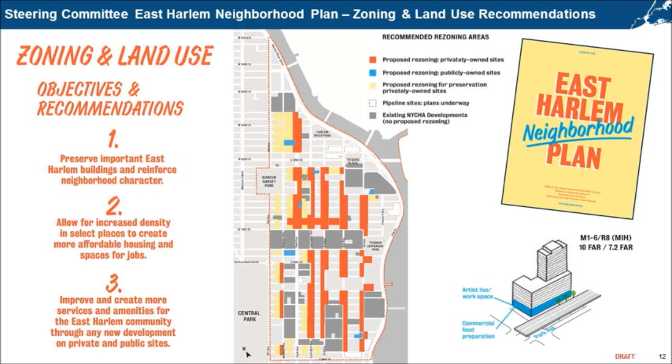Now I will discuss the existing zoning within East Harlem.

There are portions of the district that still have this zoning designation, as shown, and most of the low-rise row houses and pre-war tenements, characterized by 3 to 4 story buildings, were replaced by high-rise tower-in-the-park public housing developments.

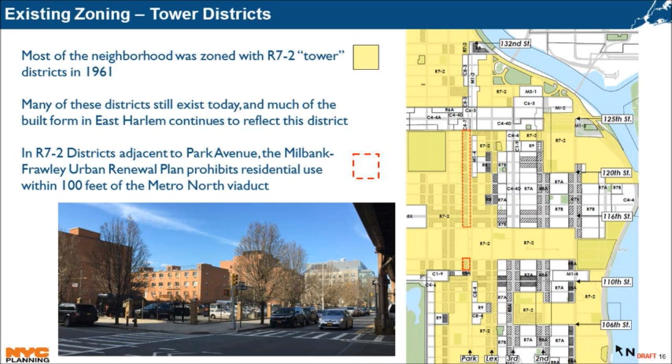Additionally, as a result of urban renewal plans mapped in portions of the district, especially along Park Avenue, shown in red outline, residential development was prohibited within 100 feet of the viaduct. This resulted in a string of parking lots and limited pedestrian activity because of the disjointed street wall and limited ground floor uses.

There are a number of districts within East Harlem where residential development is not permitted by zoning. The northern portion of the study area, above 125th Street along Park Avenue, is characterized by manufacturing and heavy automotive uses, although there are some residential uses that predate the 1961 zoning changes.

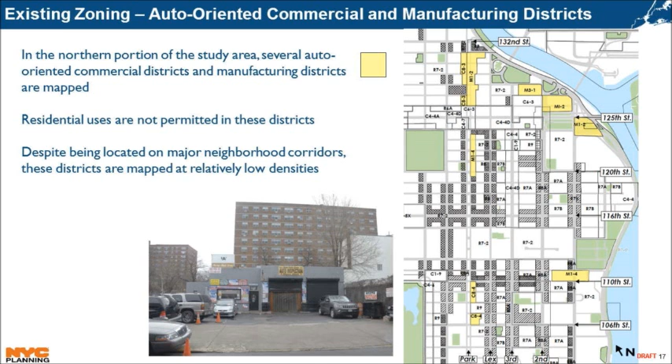The Special Transit Land Use District, mapped in portions of East Harlem along 2nd Avenue as shown in yellow, was created in the 1970s in anticipation of the 2nd Avenue subway. Existing provisions in the zoning are intended to allow for critical subway access and infrastructure.

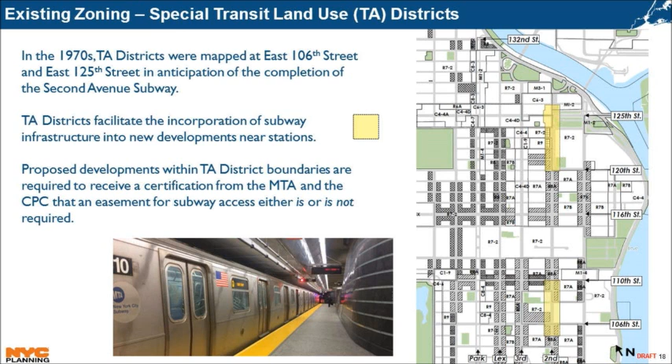In 2003, portions of East Harlem east of Lexington Avenue, between East 96th Street and East 124th Street, were rezoned. This rezoning replaced much of the existing height factor zoning with contextual zoning districts that set maximum street wall and building heights. Unfortunately, the rezoning did not result in a meaningful amount of new development, especially along 3rd Avenue, where some buildings continue to have underutilized vacant upper stories. The current zoning along these corridors does not have affordability requirements.

In 2008, portions of East Harlem were also rezoned as part of the 125th Street Special District, in an effort to strengthen the 125th Street commercial corridor. Special controls were included in certain areas of the district which restricted height limits. However, the height restrictions in the Special District, especially at the 125th Street and Park Avenue node, limit the potential of this area.

So now we'll discuss the existing neighborhood conditions in the district.

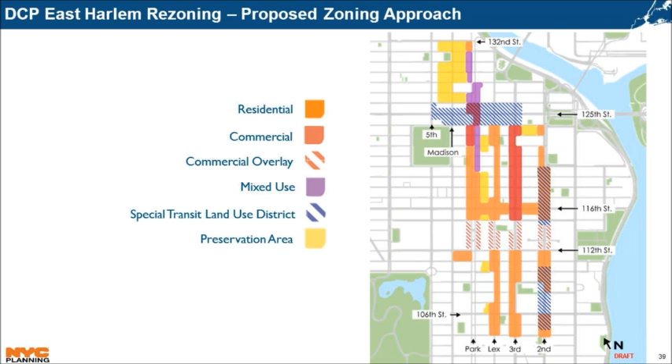In our proposal, we're trying to strike a balance between growth and preservation. In the next couple of slides, I will present a high-level explanation of the strategies that informed our zoning approach. The next part of the presentation, given by Eric Olson, will provide a greater level of detail of the proposed zoning districts based on the strategies I'm about to outline.

As part of DCP's nuanced approach, we are focusing our housing strategy in areas where modifying the zoning can create additional housing opportunities, and for the first time in East Harlem, ensure through the implementation of mandatory inclusionary housing that a significant amount of new affordable housing is required. The mandatory inclusionary housing program will be the baseline from where affordability starts, and where feasible, additional subsidies could be applied to reach deeper levels of affordability on public as well as private sites.

In addition to the housing strategy, the proposal includes strategies for economic development growth as well as job-generating opportunities. These are areas that correspond to areas where there is certain light manufacturing existing today, strong commercial corridors, and areas where the zoning can help create a new regional business district.

The zoning proposal takes into account the future transit needs of this community that will come with phase 2 of the Second Avenue subway. The proposal would modify the special transit land use district, which was originally mapped in the 1970s and does not reflect the current location and needs of the MTA in mapping their Second Avenue subway stations. The proposed changes will allow the MTA to incorporate subway infrastructure, such as station access and ventilation, into new developments surrounding the proposed subway stations.

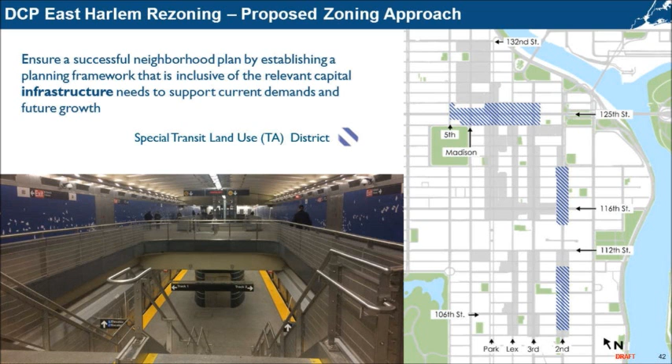There are also select areas in the study's boundaries where the department is proposing contextual districts. These are areas where the department wants to encourage new development buildings that are appropriate for the existing and consistent built context. As you may recall, most of the mid-blocks east of Lexington Avenue were mapped contextually in 2003, and this approach will now be extended to select mid-blocks west of Lexington Avenue.

We're also proposing the creation of a new zoning district, the Special East Harlem Corridors District, that will include more refined controls regarding ground floor use, urban design, and parking.

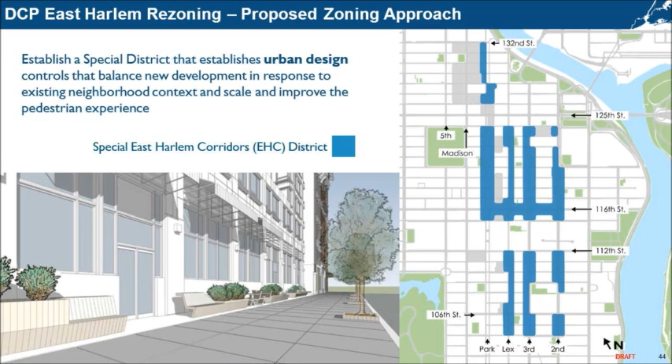As shown in the different zoning treatments being proposed, this zoning framework is not a broad brush, but a targeted approach that takes into account each distinct area in East Harlem. The proposed zoning is just one component of the neighborhood study and has been developed to complement and support a number of efforts being proposed in the city, by the city. Taken together, these approaches are expected to produce as many as 3,500 units of new affordable housing, a significant portion of which will be permanent, as well as over 2,000 new jobs.

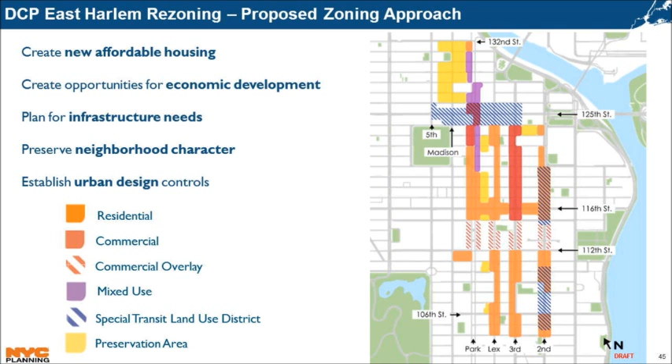To achieve the objectives that were outlined, the Department of City Planning proposes a series of actions including a zoning map amendment, zoning text amendments where we will map and establish the new Special East Harlem Corridors District, amend the special 125th Street District, amend the special transit land use district, and amend Appendix F to establish a mandatory inclusionary housing area. There will also be an amendment to the Milbank-Frawley Urban Renewal Plan, which will help remove some of the restrictions along the viaduct.

So at this point, I will turn the presentation over to Eric Olson, who will go into further detail about the rezoning and our housing and economic strategies, providing illustrative examples of how these proposed envelopes will fit into the context of the neighborhood and meet the goals of our proposal.

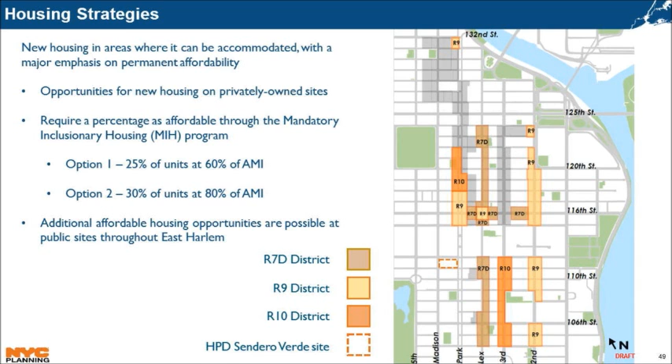On top of MIH, additional housing opportunities are available on a number of publicly held sites throughout the neighborhood. On these sites, subsidies could be provided to create more affordable units and reach deeper levels of affordability than mandated by the MIH program. One of these sites is Sendero Verde, indicated by the dashed orange boundary on the map. You'll be able to hear much more about this proposal very soon, as it's the next item on today's agenda.

Before we get too far, I just want to point out that many of the proposed zoning districts actually have 2 available envelopes, in order to provide the flexibility needed to allow buildings to respond to the differing built context and range of lot sizes in East Harlem.

The contextual quality housing envelope is based on a standard contextual envelope. These include specified ranges for base heights and a specified maximum height limit. This envelope has been modified to allow lower base heights than typical contextual envelopes, which provides flexibility for certain types of developments that may benefit from a lower base height. I'll refer to this as the contextual envelope for shorthand as we move forward.

The quality housing tower envelope is similar to the tower-on-a-base envelope we might see elsewhere. These allow maximum heights to be governed by available FAR with specified minimum and maximum base heights. We've modified the standard tower-on-a-base envelope with additional street wall provisions as well as lowered minimum base heights. I'll refer to this simply as the tower envelope throughout the presentation. These two options will allow the construction of buildings that serve different needs while establishing a level of consistency in the pedestrian experience. I'll now go into detail about these envelopes in the various districts where we've proposed them.

You will be seeing a number of detailed slides on each discrete zoning treatment in the next several minutes. So this is just a warning. This might be a good time to go grab some coffee.

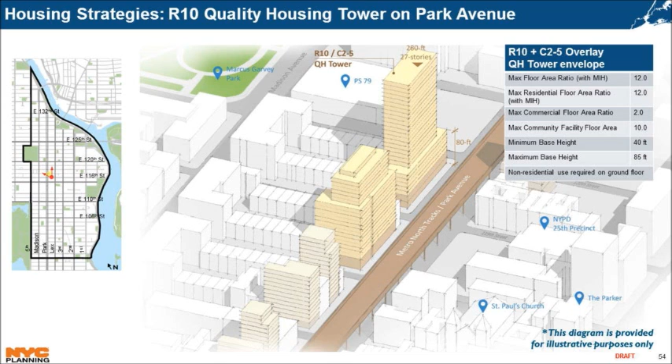There is no maximum total height limit specified within this envelope. Instead, the amount of available FAR effectively limits the heights in these districts. The illustrative massing rises up to 280 feet, or 27 stories. The R10 Tower envelope would have the same FAR available as the contextual envelope, with the ground floor non-residential use requirement as enacted through the special district.

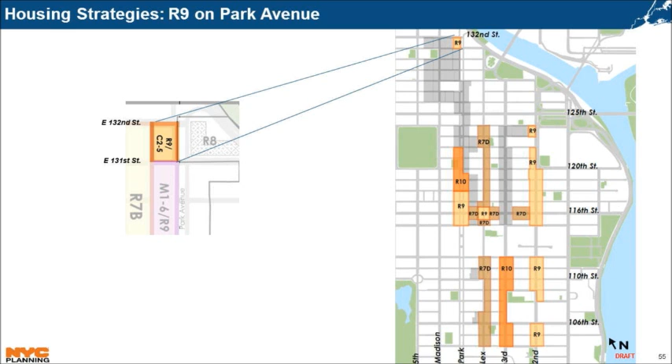Next, I will discuss the R9 districts we propose along Park Avenue, which would be paired with a C2-5 overlay, as in the majority of the residential districts we've proposed. R9 is proposed along the west side of Park Avenue, between East 131st and 132nd Street, which is currently mapped as R7-2. These R9 districts transition to a lower density for areas further away from the transit hub at Park and 125th.

Here's a detail of where we've proposed the same district further south along Park Avenue, between roughly East 115th and 118th Street. MIH would be mapped in each of these areas, as would the Special East Harlem Corridors District.

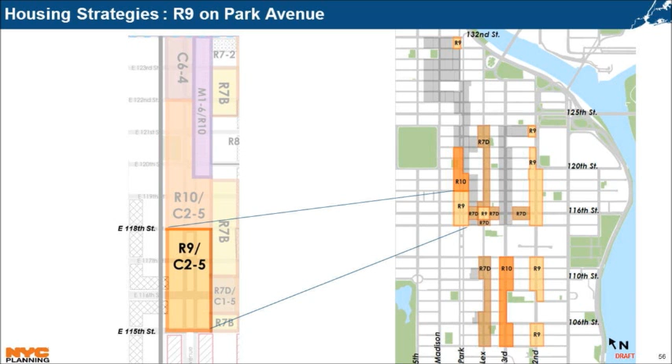This view captures this lower section of Park Avenue looking to the northwest, just north of Taft Houses. This stretch of Park contains some residential buildings that were constructed before the approval of the Milbank-Frawley Urban Renewal Plan. There are fewer parking lots here than in other areas of Park Avenue, and a more consistent street wall.

Possible developments in this area may be smaller due to smaller sites and the lower density district being proposed. The removal of the Milbank-Frawley urban renewal restrictions on residential use within 100 feet of the viaduct would also unlock residential development on this stretch of park.

The R9 contextual envelope has a maximum base height of 125 feet, with a minimum base height lowered to 40 feet as with elsewhere on park. The maximum total height limit in the R9 contextual envelope is 170 feet, or 175 feet with a qualifying ground floor. This is also capped at 17 stories. Through the Special East Harlem Corridors District, we would introduce a maximum residential FAR of 8.5 for all R9 districts, including this R9 district.

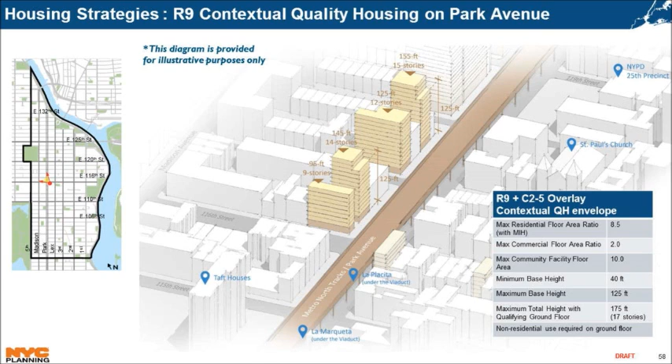So now we'll move eastward to discuss the proposed R7D districts along portions of Lexington Avenue and East 116th Street. We propose this district roughly along Lexington Avenue between 115th and 124th Street. This area is currently mapped with an R7-2 district. The R7D would introduce an appropriate density and built form that would complement the portions of the Lexington corridor with consistent character. C1-5 and C2-5 overlays are proposed along the length of the Lexington R7D district.

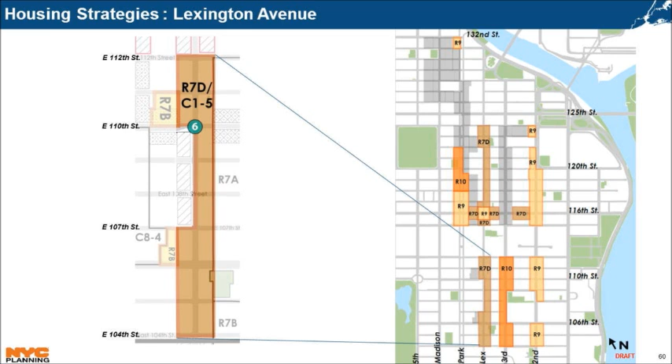Another R7D district is proposed along Lexington between 104th and 112th Street. This R7D on Lexington would introduce a contextual street wall requirement, which would encourage new development compatible with the existing scale and character of the corridor.

The final set of R7D districts are proposed along East 116th Street. The mid-block between Park and Lexington Avenues is currently zoned with R7-2 with a C1-4 overlay, and the mid-blocks between Lexington and 2nd Avenues, here and here, currently have the R7A designation with existing commercial overlays C1-5 that would remain. R7D is proposed along the mid-blocks of East 116th Street, as you can see here, on all these mid-blocks as described between Park and 2nd Avenue.

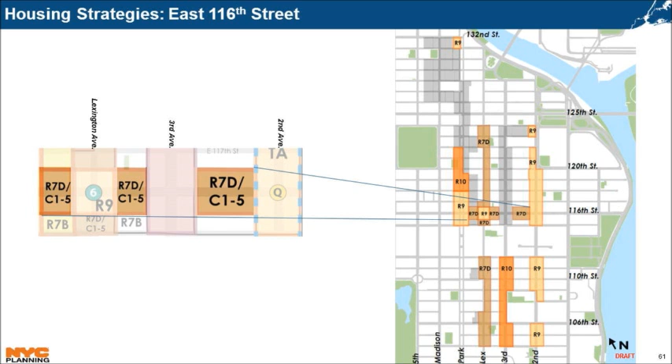Higher densities are proposed at each of the avenue intersections in the area. Here you can see what the entirety of the portion of East 116th Street that would be rezoned would be. East 116th Street is one of the most prominent retail corridors in the neighborhood, and this strategy will focus density on key nodes to integrate this vibrant stretch with other key north-south corridors.

The non-residential ground floor requirement will maintain consistent commercial activity throughout each area highlighted on the map, and the proposed rezoning to R7D districts on the mid-blocks will ensure that new development also includes permanently affordable units through MIH. This varied treatment responds to existing and proposed transit nodes at Lexington and 2nd Avenue, with particular attention paid to the existing scale of these mid-blocks.

The R7D envelope proposed along East 116th Street would be the same as the R7D elsewhere on Lexington. Here's an image depicting Lexington Avenue. We wanted to show this to point out sort of scale and proportionality of the street. It's already, for the most part, been developed to a scale appropriate for the width of the street, which is 70 feet wide. Our proposed zoning is intended to mirror this built form.

This image shows that East 116th Street has a similar character and scale. New developments utilizing the R7D contextual envelope could be expected to largely maintain the existing height and scale of portions of these corridors. The proposed R7D districts have a maximum base height of 95 feet with a minimum base height of 60 feet. Maximum total heights in R7D districts are capped at 110 feet or 115 feet with a qualifying ground floor. The maximum number of stories is 11.

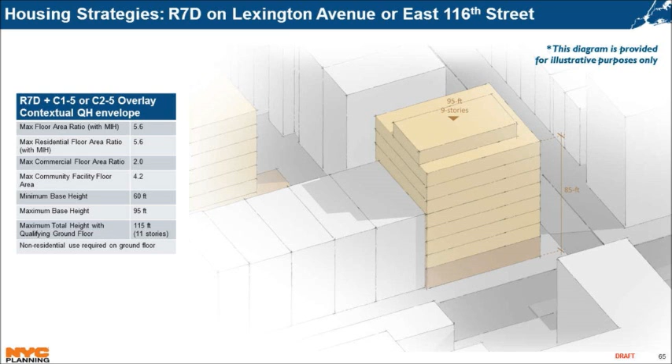So while we're discussing Lexington and 116th Street, let's talk about the zoning envelope we propose at the intersection of these two corridors. Within a 100-foot boundary of this intersection, we're proposing another R9 district with a C2-5 overlay. The proposed R9 district would orient growth at the existing transit node at the 116th Street station along the Lexington Avenue Local 6 line, allowing developments to locate new affordable residential units close to transit.

Here's a view of that intersection facing to the northwest. Compared to other sections of East 116th Street and Lexington Avenue, there are more opportunities for residential development at this node. The R9 contextual envelope is being proposed in this area.

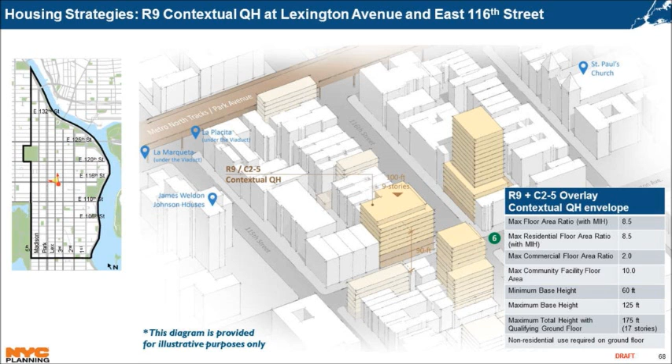The R9 quality housing tower envelope is an option at this node as well. It has base heights from 60 to 85 feet, slightly higher than the proposed minimum base heights along Park, due to the different context. There is no maximum total height specified for this envelope; heights are effectively limited by the amount of available FAR.

Moving eastward to the lower portion of the 3rd Avenue corridor, we'll now focus on the proposed R10 district with a C2-5 overlay between East 104th and 112th Street. This area is currently mapped with an R8A district. Portions of this area of 3rd have been left out of the rezoning due to the presence of the Franklin Plaza Co-op towers.

This is a view facing southeast along 3rd between East 106th and East 109th Street. 3rd Avenue has a highly varied built form with a combination of tenements, towers, and low-scale commercial buildings. This image illustrates the generous width of 3rd Avenue, which has the capacity to accommodate added height and bulk. This, combined with the significant development potential on the avenue and its access to nearby transit corridors, makes 3rd Avenue an ideal location for density.

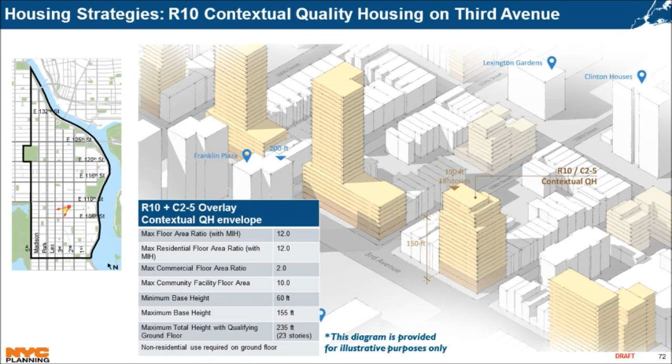There is also a requirement for ground floor non-residential use in this area to maintain activity along this active commercial corridor. Use and FAR regulations would be the same as the previously discussed R10 district on Park.

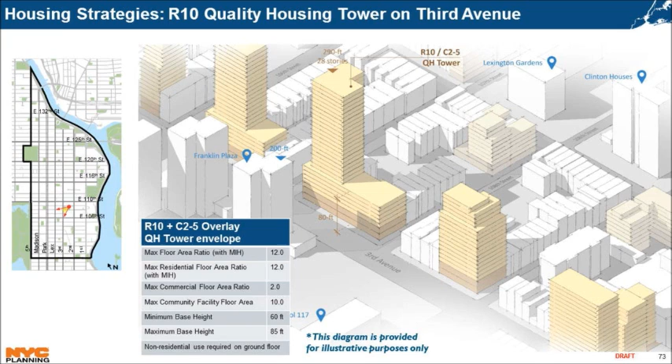So now moving on to 2nd Avenue. R9 districts are proposed along much of 2nd Avenue to direct new residential development in areas close to transit. This area is mapped with R8A districts currently. The proposed density increase would make MIH applicable to ensure that income-restricted units are included in new residential buildings.

This slide highlights the R9 districts proposed along 2nd Avenue north of East 115th Street. This would cover portions of the avenue from 115th to 124th Street, excluding existing tower developments. South of 120th, we are proposing adjustments to the Special Transit Land Use District to accommodate easements for subway access and ancillary ventilation space. We'll describe more about these TA districts later in the presentation.

On the lower portion of 2nd Avenue, we've proposed this same R9 district. Similar to the area to the north, this area of 2nd is currently mapped with an R8A district. The proposed R9 would range from East 104th to East 112th Street, excluding areas again with existing tower developments. You can see that a TA district would be mapped here as well.

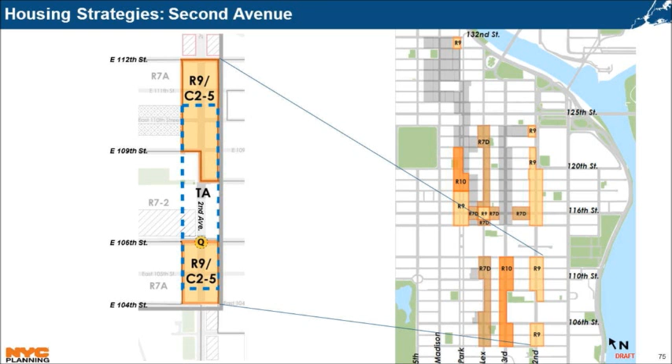This aerial image faces southwest, generally covering the portion of 2nd between East 122nd and East 119th Street. For reference, you can see the location of Taino Towers.

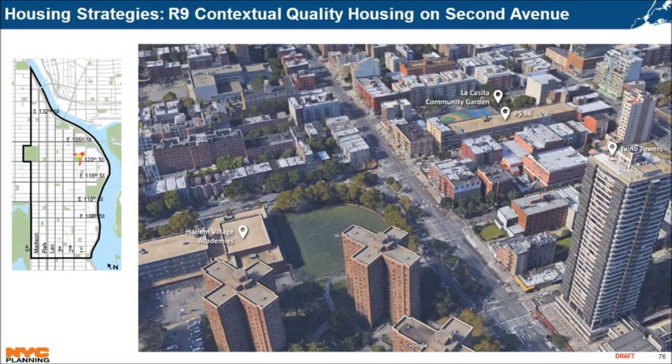These ancillary structures are not provided for in the existing zoning, but are critical pieces of infrastructure to support the future 2nd Avenue subway. Because the floor area allocated to this use would be exempted from zoning calculations, the total volume for this building could be expected to be bulkier and/or taller than a typical development at this site. Buildings shown in this area range between 9 and 17 stories.

So now we'll focus on a portion of 2nd Avenue where a quality housing tower development could occur. This view faces southwest, looking at the area just north of the Jefferson houses.

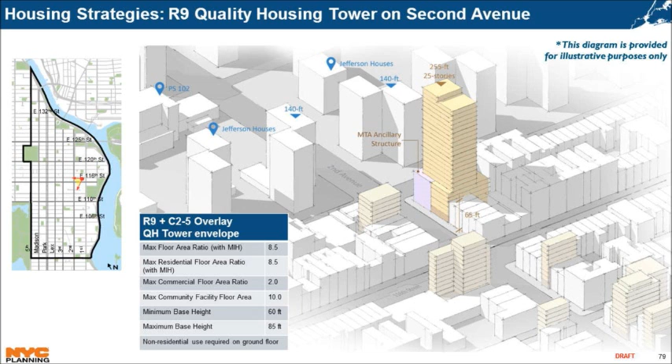We'll now move on to the economic development component of our rezoning strategies.

These strategies are oriented towards preserving the character of existing corridors by continuing to allow the same commercial and manufacturing use groups as today, while at the same time increasing densities in certain areas to encourage developments with a desirable mix of uses. Other components include a new minimum non-residential floor area requirement and mixed-use districts of varying scales along Park. Commercial overlays are also being proposed to promote a more continuous, active retail environment along major corridors.

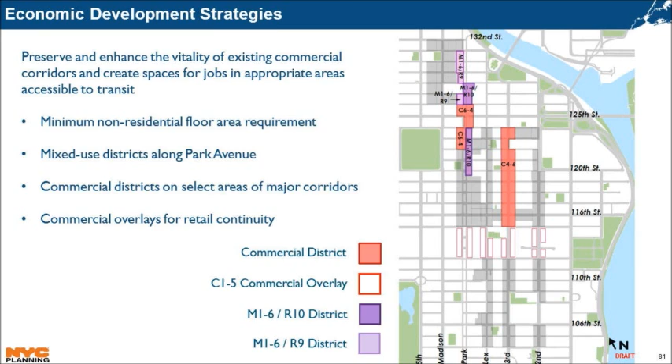So let's begin our detailed discussion of zoning districts as part of our economic development strategies at East 125th and Park at the transit node. As we mentioned earlier, this area is situated to be a major regional transit hub with the existing Metro North and Lexington Line stations and the future terminus of the 2nd Avenue subway. This makes it an appropriate location for the density being proposed, which would permit significant amounts of housing and commercial activities at this important node.

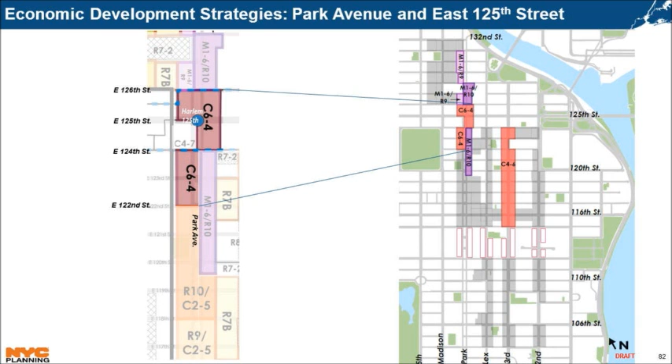C6-4 is proposed along Park Avenue between East 124th and 126th Street, excluding the block frontage on the southwest corner. These block fronts in particular lie within a C6-3 district currently within the existing special 125th Street district. C6-4 is also proposed on the west side of Park Avenue between East 122nd and East 124th Street. These southern blocks are currently zoned R7-2. These two block fronts would lie within the Park Avenue subdistrict of the proposed Special East Harlem Corridors District.

Prominent buildings at the intersection of Park and 125th Street include the Corn Exchange Building on the northwest corner of Park and East 125th, and the Lee Building on the northeast corner, as Calvin explained earlier. Some of us may remember the Lee Building as the building Wesley Snipes swung from in the movie U.S. Marshals, eventually landing on a nearby Metro North train. Just to put everything in context here.

This will produce a mix of retail, performing arts, and other commercial uses at the base of residential developments with permanently affordable units through MIH. Non-residential uses in this area are given 12 FAR floor area, with 2 FAR of non-residential floor area required in mixed-use buildings throughout this part of the special district. This limits residential uses to 10 FAR with MIH. This will likely include both local serving and destination retail, in addition to other job-generating non-residential uses.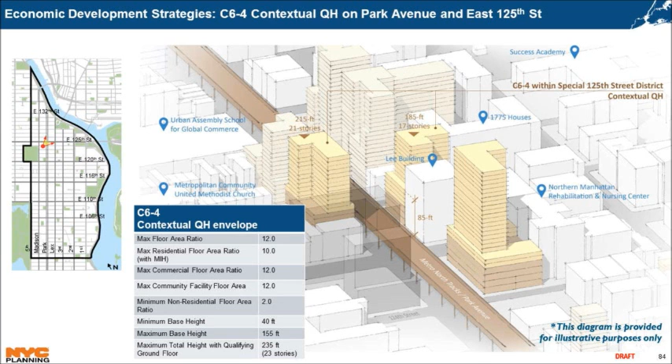Now we'll focus on the C6-4 tower envelope, which is similar to other proposed quality housing tower envelopes we've explained. Buildings on this specific block between 124th and 125th Street on the east side would be required to set back 10 feet from the street line in order to accommodate the high levels of pedestrian traffic adjacent to the Metro North Viaduct.

Building heights here would be limited by available FAR. In addition, due to flight approaches to LaGuardia Airport above 125th Street, heights are effectively limited here by the Federal Aviation Administration to roughly 35 stories.

The same set of FAR and use regulations would apply throughout the C64 district. C6 districts are typically mapped in active business districts rich with transit access, making it appropriate for this area.

Next, I'll describe the new M16R10 districts we're proposing along Park Avenue. To the north, we've proposed this district in an existing M12 district along the eastern block front of Park Avenue, on a superblock between 126th and 128th Street. And we've also proposed it in an existing M14 district further to the south, from roughly East 120th to East 124th Street. The M16R10 district would allow existing light manufacturing uses to remain while providing owners with opportunities to expand in place.

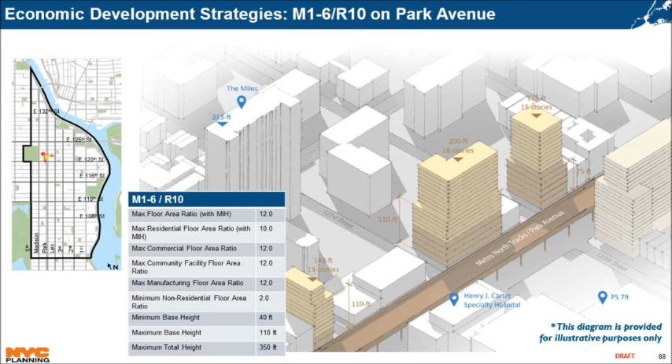The proposed M16R9 district is essentially just a smaller scale version of what I described for the M16R10. We've proposed this to replace existing C83 auto-oriented commercial districts on the west side of Park Avenue from East 126th to East 131st Street, excepting the block frontage where the Urban Assembly School is located.

The lower densities and lower heights in this area are intended to provide a transition between the M16R10 district on the east side of Park and the mid-block preservation area to the west.

There are a number of parking lots and auto-oriented uses in the area today, a substantial underutilization of this area considering its proximity to multiple transit stops.

This view faces southwest from about East 128th to East 123rd Street. You can see the Urban Assembly School here for context.

The massing in yellow shows one development we could expect in the M16R9 district. As with the other proposed mixed-use districts, residential units would be encouraged to locate above the height of the viaduct.

Base heights in these districts would range between 40 and 85 feet, with a total maximum building height of 285 feet. Consistent with the other proposed R9 districts, maximum FAR would be capped at 8.5. Due to the proposed 1.5 FAR non-residential use requirement here, the maximum residential FAR would effectively be limited to 7.

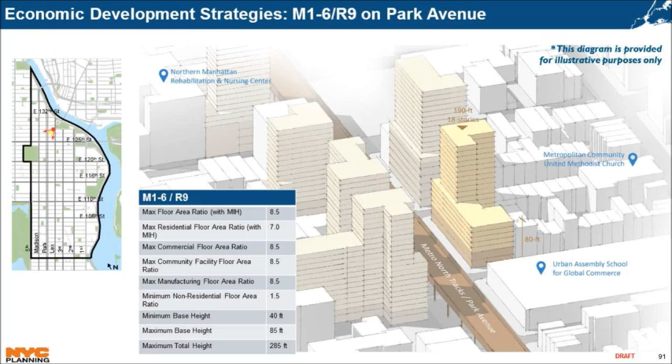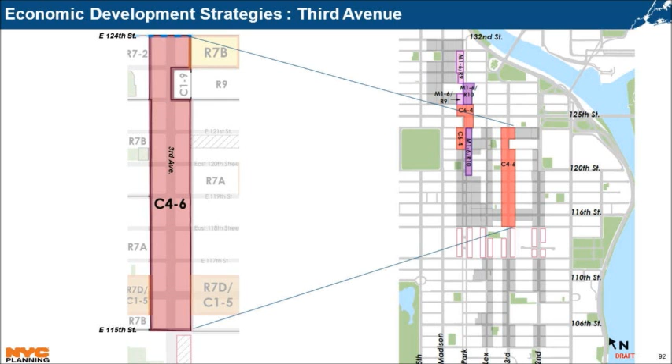Moving east from the Park Avenue corridor, we've proposed a C4-6 district on 3rd Avenue from East 115th Street to 124th Street. This would exclude the block front where Taino Towers is currently located. Today, C44 and C44D districts are mapped on this corridor.

The proposed envelopes would provide the flexibility needed to allow developments to relate to these built form variations. As illustrated by the number of massings you see on the slide, there was a lot of development potential in this area. As with elsewhere on 3rd, the contextual envelope would offer a wider range of base heights, from 60 to 155 feet.

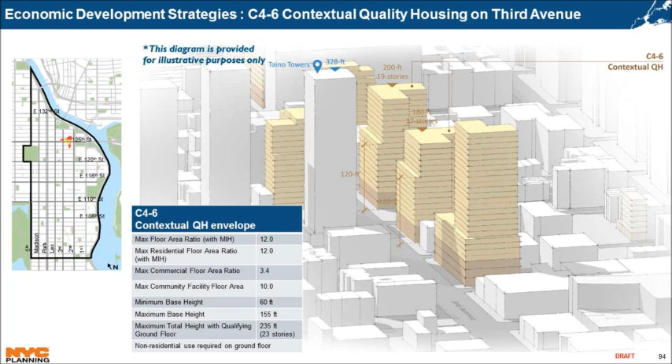Maximum heights are the same as with the other R10 equivalent contextual envelopes we've discussed. The total maximum residential FAR in this area would be 12 with MIH. 3.4 FAR would be available to commercial uses as it is today under the existing C4 districts. This would encourage new developments that match the existing uses on the corridor, which include several buildings with active upper story commercial use.

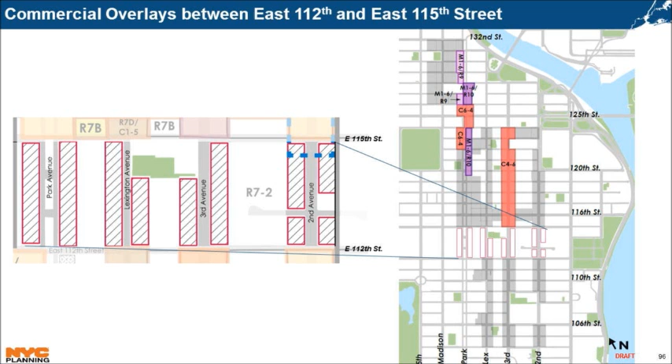Another component of our proposal is the mapping of C1-5 commercial overlays along major corridors between East 112th and East 115th Street, where the King, Johnson, and Taft houses are located. C1-5 overlays are proposed along Park, Lexington, 3rd and 2nd Avenues, excluding areas where schools and playgrounds exist. Active ground floor commercial uses could encourage more pedestrian activity in this area, connecting the vibrant retail corridors along the northern and southern portions of each of these avenues.

Next I will describe our strategies regarding the integration of transit infrastructure as it relates to zoning.

The TA districts exist in East Harlem today in order to provide opportunities to accommodate subway infrastructure into new mixed-use developments to accompany the construction of the 2nd Avenue subway. One way we intend to accomplish our proposed goals is to be inclusive of modern infrastructure needs and better match where the MTA plans to construct new subway stations.

The existing special transit land use district zoning provisions require new developments to certify that an easement either is or is not required for subway access on their property. Though the completion of the 2nd Avenue subway is not expected until 2027, it's necessary to modify the existing boundaries to correspond with anticipated station locations to ensure that the construction of subway infrastructure is appropriately coordinated with new development in these areas.

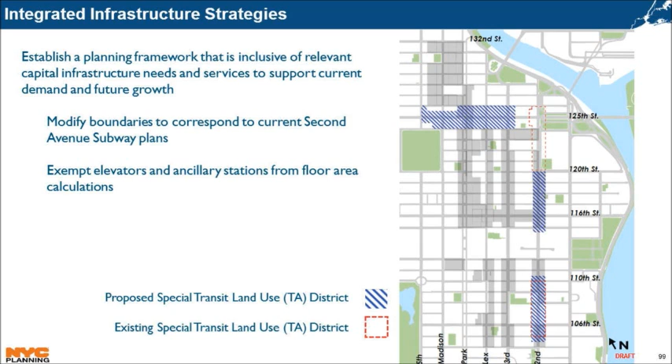To accommodate future plans for the terminus of the 2nd Avenue subway to exist in this location, the proposed actions would map the district roughly between East 126th Street to the north, 3rd Avenue to the east, East 124th Street to the south, and 5th Avenue to the west. The proposed TA district boundary has been mapped to avoid areas where contextual R6A districts were mapped during the 2008 rezoning along East 125th Street.

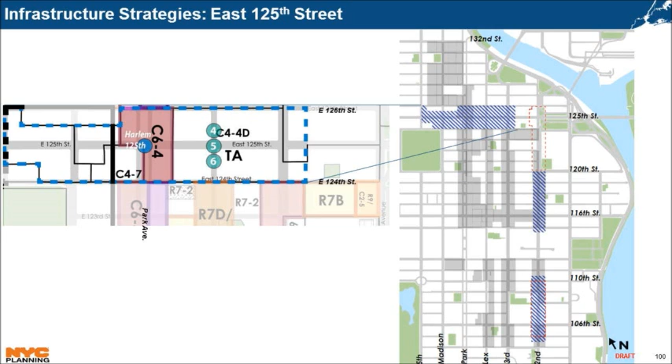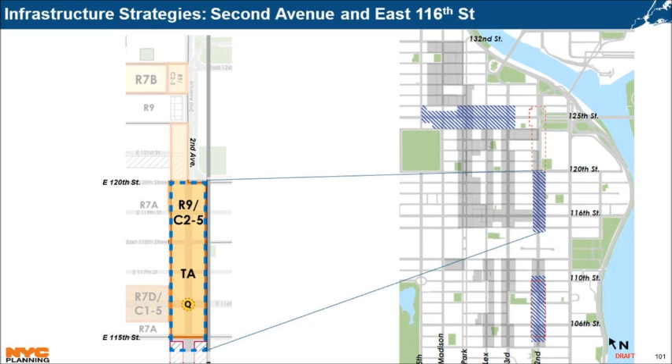The proposal would also map a new TA district to accommodate an anticipated future 2nd Avenue subway stop at East 116th Street. The proposed TA district at East 116th Street would be along 2nd Avenue from roughly 115th to East 120th Street. And further south on 2nd Avenue, the proposal would expand an existing TA district where the future East 106th Street stop would be located.

Existing TA district zoning provisions require new developments within these boundaries to receive a certification from the CPC and the MTA. These two entities make a determination based on a set of findings whether or not an easement for subway infrastructure or access is needed on the site. We are proposing text that would expand the potential use of these easements to include ancillary vent facilities and elevators. This joint certification could require easements based on findings related to a number of factors.

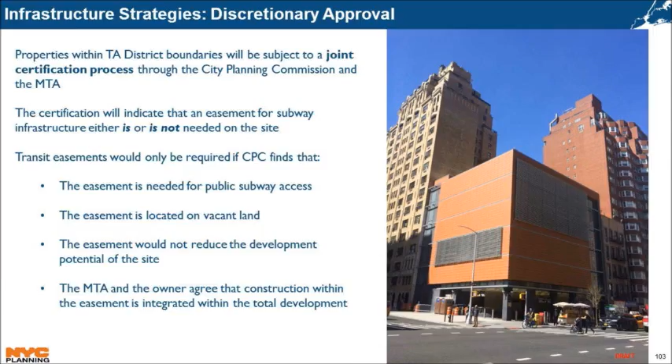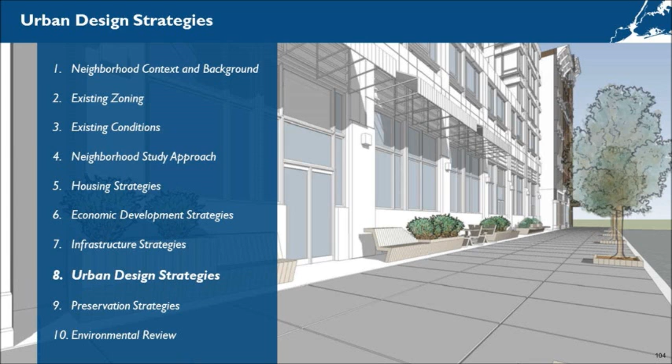Though I've mentioned a number of ways in which the proposed zoning envelopes have been modified through the special EHC district, I'll now summarize the provisions to provide a bit more clarity. The special EHC district includes use and bulk regulations, as well as other zoning treatments to activate the pedestrian realm.

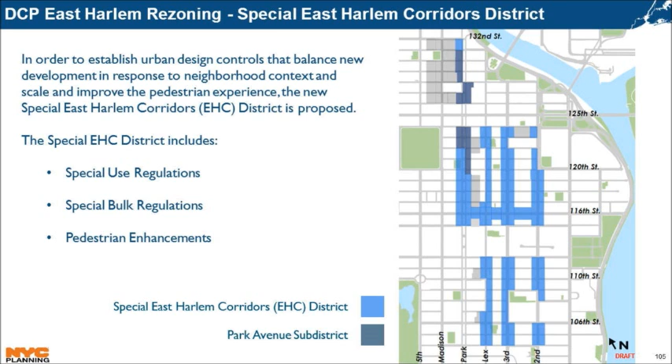I've already mentioned the non-residential use requirements many times, which require a minimum amount of non-residential floor area in the Park Avenue subdistrict, shown in the darker blue shade, and ground floor non-residential use throughout the entirety of the special district. The special EHC district also removes parking requirements tied to residential use, in order to facilitate the efficient production of housing without requiring the added costs of constructing parking.

Just as today, public garages would be allowed of up to 150 spaces in many areas, with 100 spaces allowed in other districts, to allow the market to accommodate potential future demand for parking.

The proposed special EHC district would include a new special permit for hotel use throughout the entire geography. This special permit would be required for any new hotels constructed before a residential development goal has been reached, to ensure that new hotels do not compete with the objective of providing new housing units in the special district. This would also apply within the C6-4 district proposed within the special 125th Street district in this area.

Another new provision of the special EHC district would allow residential and non-residential use to be located on the same floor, provided that an adequate barrier is in place to separate these two uses.

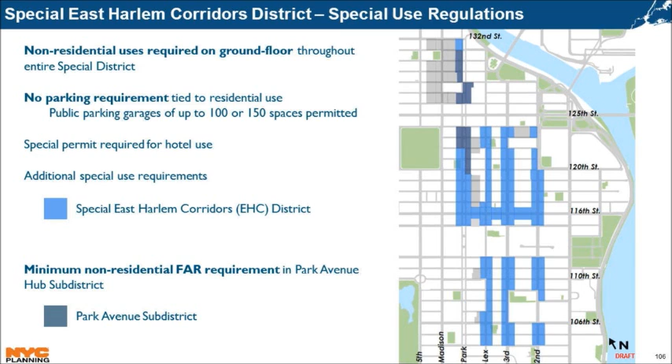We've also included many provisions that are typically a part of enhanced commercial districts mapped elsewhere in the city. This includes a requirement that 50% of facades are transparent, as measured between a height of 2 and 12 feet. These provisions would be relaxed for uses like light manufacturing, which could be constrained by this requirement.

The special district also limits the width of residential lobbies to 25% of the building frontage, up to a width of 40 feet, with no lobby required to be less than 20 feet. Curb cuts would not be permitted along wide streets to ensure a continuous pedestrian flow.

Additionally, a set of provisions is included that would apply to portions of the proposed rezoning area that lie within the flood zone. These were designed to encourage flood resiliency and good urban design by providing options for buildings that need to elevate their ground floor to reduce the potential for flood-related damage.

And finally, we'll discuss preservation-oriented strategies. Before we get into it, I want to point out that these strategies are concerned with the preservation of built form, as opposed to the preservation of affordable housing units or historic resources.

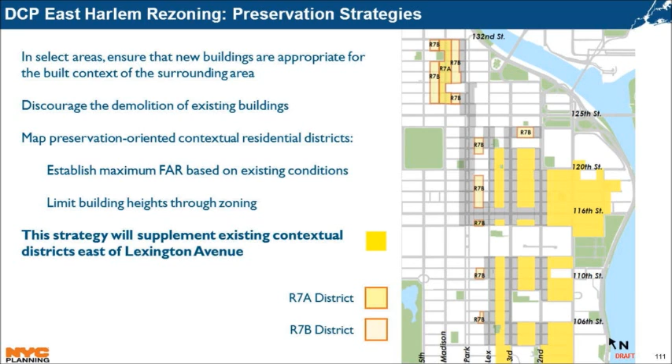We'll begin with the proposed R7A district along Madison Avenue between roughly 126th and 132nd Street. Block fronts with school or playground uses have been omitted from the proposed rezoning area. This area is currently mapped with an R7-2 district, which would remain on the sites with school use.

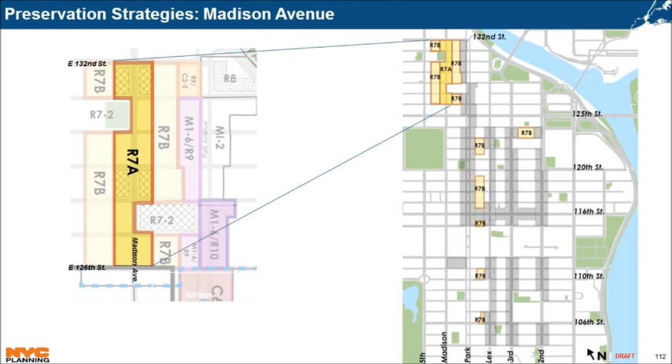This section of Madison is largely characterized by residential use with some intermittent commercial and community facility uses. As depicted in this image, the street wall along this stretch of Madison is relatively consistent, as are heights and densities along the corridor.

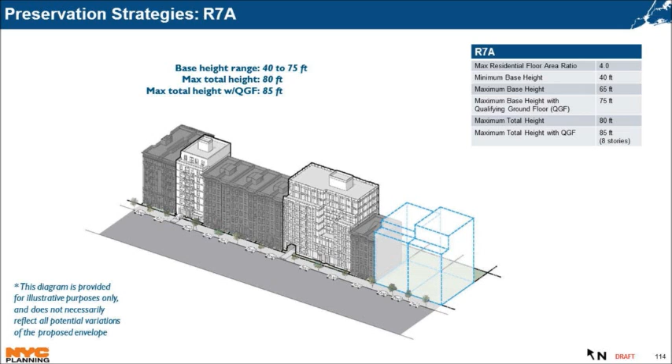This diagram depicts how the R7A district would require new developments to more closely match the existing built form. The R7A envelope offers 4 FAR for new developments and is meant to be mapped along wider streets such as Madison Avenue in this area. Base heights could range between 40 and 65 feet, or 75 feet with a qualifying ground floor. Maximum total height would be set at 80 feet, or 85 feet with a qualifying ground floor.

On mid-blocks throughout the study area, we've proposed a number of R7B districts as well. These are depicted in the lighter shade of yellow shown on the map.

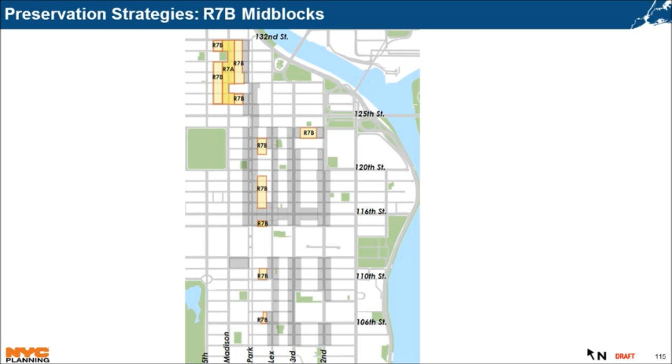The R7B envelope is meant to be mapped on narrow streets where we propose these districts throughout East Harlem. The maximum FAR is capped at 3, with base heights ranging between 40 and 65 feet. The permitted total maximum height is 75 feet, which is slightly lower than with the R7A.

And that concludes our section on preservation-oriented strategies. Here you can see all of our strategies combined in a map depicting our proposed map amendments.

To state the obvious, I covered a large amount of information about the rezoning proposal. The numerous strategies covered are all directed towards achieving the intended goals of the rezoning, including to create opportunities for new housing, with a focus on opportunities to require new permanently affordable housing, to create opportunities for economic development while preserving the vitality of existing commercial and manufacturing uses, to support current demands and future growth by establishing a planning framework that is inclusive of modern transit infrastructure needs.

To modify the existing zoning where needed to preserve neighborhood character, and to establish a special district with urban design controls that balance new development in response to existing context and scale. Hopefully, throughout the course of this presentation, it has become clear that DCP has employed a nuanced approach to this proposal.

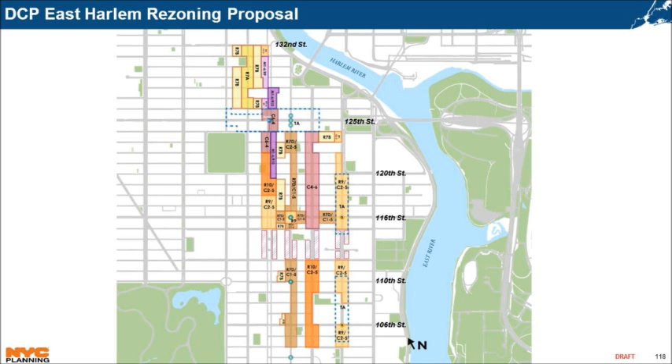More importantly, though, the proposal would lock in MIH in much of East Harlem to bring requirements for the creation of permanently affordable housing to areas where this requirement does not currently exist.

The presentation will now conclude with a brief section regarding environmental review. There's only one slide left.

The DEIS does identify the potential for a few types of significant adverse impacts in other chapters. These include impacts related to construction noise, historic and cultural resources, transportation, including traffic, pedestrian, and transit, and shadow impacts on certain sensitive receptors in the area.

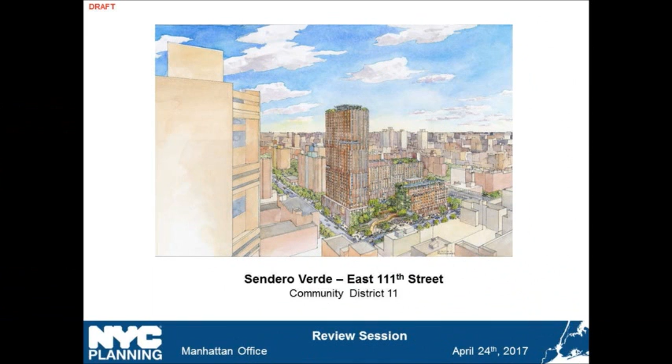Thank you. Good afternoon, Chair Lago, Commissioners. This is an application by the New York City Department of Housing, Preservation, and Development for a number of discretionary actions to facilitate the development of a mixed-use building with residential, commercial, and community facility uses on a block bounded by East 112th Street, Park Avenue, East 111th Street, and Madison Avenue.

The applicant is seeking a zoning map amendment to rezone an existing R7-2 zoning district with a C1-4 overlay to an R9 zoning district with a C2-5 overlay, a zoning text amendment to establish a mandatory inclusionary housing area, Urban Development Action Area Plan, or UDAAP, designation and project approval for the disposition area, disposition of city-owned property, acquisition of a portion of the disposition area by the city for community garden use, a special permit pursuant to section 74-743 to modify the bulk regulations within a large-scale general development to modify height and setback restrictions and yard requirements applicable to the proposed development.

A special permit pursuant to section 74-744B to permit commercial floor area to be located above the second story in a mixed-use building, a special permit pursuant to section 74-532 to waive up to 129 accessory parking spaces required in connection with non-income restricted dwelling units within the proposed development, and a City Planning Commission certification pursuant to section 32-435 to waive the requirement that a minimum of 50% of a building wall facing upon a wide street be occupied at the ground level by commercial use.

The project area is located in the East Harlem neighborhood of Manhattan in Community District 11. The properties surrounding the project area are zoned R7-2 and R8A with a C1-5 overlay mapped along 110th Street between Park and Madison Avenues, and C1-4 and C2-4 overlays mapped along Madison and Park Avenues.

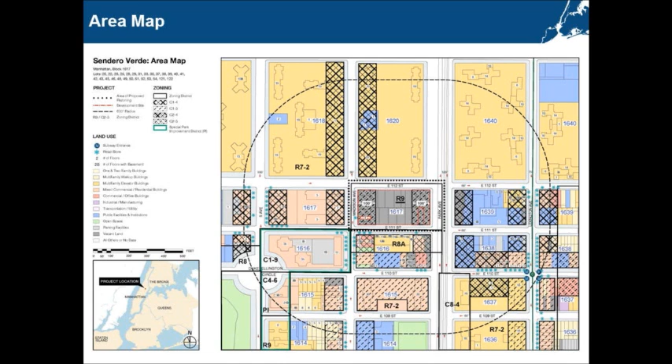The project area is an entire block bounded by Park Avenue to the east, East 111th Street to the south, Madison Avenue to the west, and East 112th Street to the north. The project area contains approximately 76,576 square feet of lot area.

The majority of the project area is city-owned parcels, and the city-owned portions are all contained in this red outline here. The remaining 2 lots located in the project area are privately owned and not part of the development site.

Lot 21, located right here, is improved with a single 4-story building comprising approximately 4,100 square feet of floor area and containing 8 residential units as well as 2 commercial units. Lot 34, located right here, is currently utilized as surface parking and used for storage.

In prior years, part of the development site was used as a baseball field by the East Harlem Little League under temporary license with HPD. The license agreement expired in October of 2016, and the East Harlem Little League has obtained a permit through the Parks Department to play on a nearby Parks Department field. The lots previously licensed to the Little League are currently vacant.

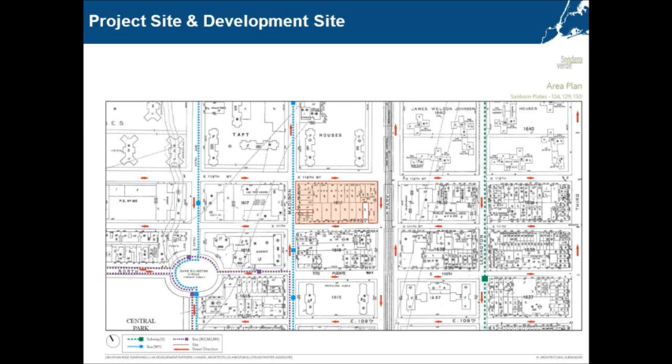This right here is one of the out parcels with the 4-story development. You can see the vacant lot where the Little League used to play. This right here is Lot 34, which is the vacant parking lot.

The development site currently contains 6 interim Green Thumb gardens that are located on city-owned parcels along the Park and Madison Avenue block frontages. These interim gardens operate under a temporary license agreement with HPD, which have allowed for garden-related activities until a viable development scenario can be achieved for the site.

The proposed development includes the construction of 3 predominantly residential mixed-use buildings on the development site, ranging in height from 10 to 37 stories. In total, the proposed development contains approximately 718,447 square feet of floor area, or 9.38 FAR, of which approximately 544,069 square feet of floor area will be residential, or 7.1 FAR.

33,794 square feet will be commercial, that is 0.44 FAR, and 140,485 square feet, or 1.83 FAR, of which will be community facility use. The development will occupy all frontages of Block 1617 along East 111th Street, Madison Avenue, East 112th Street, and Park Avenue, on all areas except for those development sites that are not currently owned by the city.

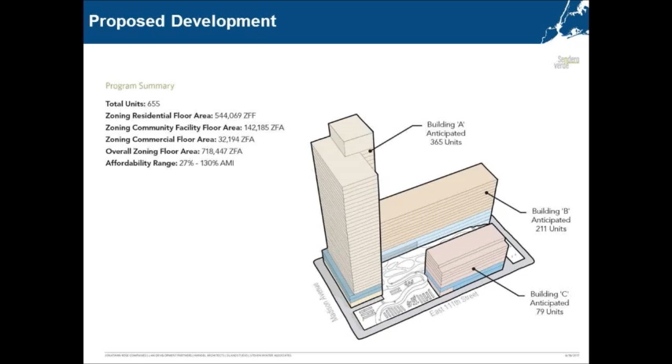Building A will contain approximately 365 residential units with approximately 308,723 square feet of residential floor area, approximately 10,311 square feet of community facility floor area, and approximately 32,194 square feet of commercial floor area. Part of this commercial floor area will include a supermarket.

Building B, seen right here, is proposed to be located along the remainder of the East 112th Street frontage and wrap around Madison Avenue for a depth of approximately 72 feet. It is proposed to have up to a 5-story base that rises up to 85 feet above the base plane. Above the base, the building would set back the required 10 feet from the street line and rise to a height of 15 stories with a height of up to 218.5 feet.

Building B will contain approximately 211 residential units with approximately 163,945 square feet of residential floor area and approximately 120,934 square feet of community facility floor area. A portion of this community facility floor area would be a charter school.

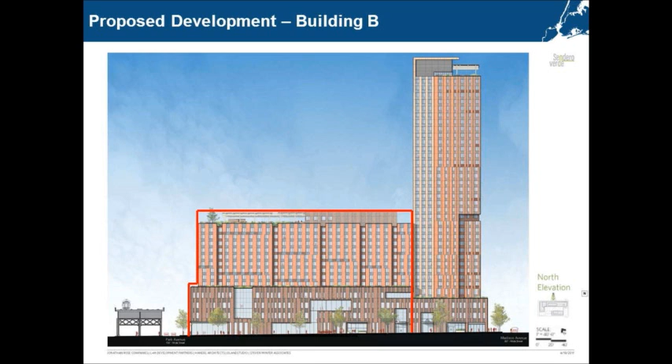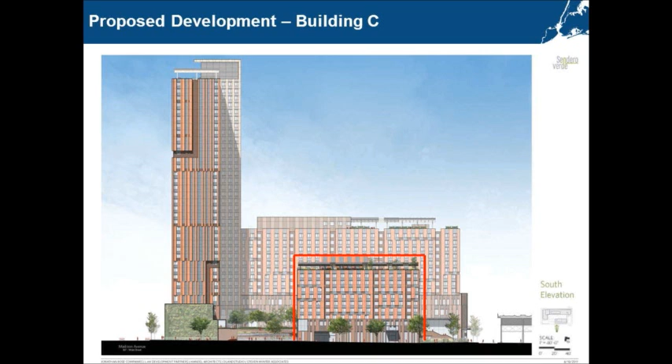Building C is proposed to be located on the mid-block frontage of East 111th Street. It is proposed to have up to a 7-story base that rises up to 94.34 feet above the base plane. Above the base, the building will rise to a height of 10 stories, with a height of approximately 151.34 feet. Building C will contain approximately 79 residential units with approximately 71,401 square feet of residential floor area and approximately 10,941 square feet of community facility use.

Buildings A, B, and C will be built to passive house standards. To achieve passive certification, the project will employ a number of sustainability features, including a stormwater detention tank to provide recycled water to the on-site community gardens, bioswales, and street trees on the sidewalks surrounding the site, photovoltaic arrays on each of the bulkheads, and green roofs featuring solar pergolas with photovoltaic arrays.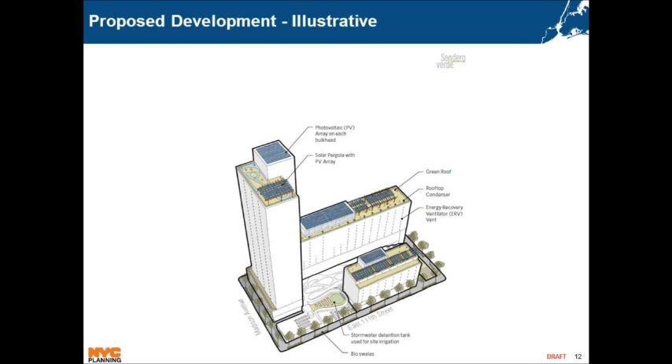The proposed buildings will form a courtyard within the center of the development. The courtyards will provide passive landscape recreation space and propose to include features such as a medicinal garden, seating, and general green space. Public entrances to the courtyards will be provided along Park Avenue through a staircase and elevator, as well as along East 111th Street through an ADA accessible path. The courtyard will also be accessible through rear entrances that join the community facility spaces.

Community gardens will be located on the corner of Park Avenue and East 111th Street, on the corner of Madison Avenue and East 111th Street, and on East 111th Street, extending in a terrace fashion towards the elevated courtyards described above. So the garden areas are located here, here, and here. The garden area will accommodate approximately 4 of the existing interim Green Thumb gardens. The remaining 2 gardens located on the development site have been offered relocation sites on other nearby existing DPR gardens pursuant to the garden rules.

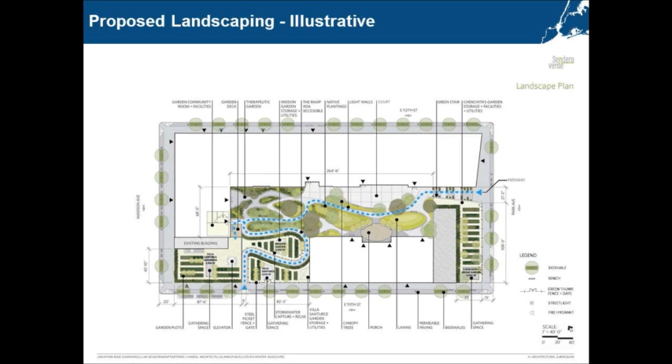A dedicated community room and bathroom, available to members of all 4 gardens, will be located within Building A. An additional bathroom will be located adjacent to the community gardens on Park Avenue. Additionally, a public pathway will pass through the gardens along East 111th Street, connecting to the interior courtyard, which must be maintained by the owner of the proposed development and remain accessible to the public during hours to be determined through negotiations between the City of New York and the developer.

According to the applicant, the proposed orientation of the 3 primary residential buildings within the development are massed in a manner that preserves the maximum amount of open space that currently exists within the development site and offers a design that provides contextual juxtaposition to the tower-in-the-park developments located directly to the north, and a contextual counterpart to the mid-rise development in the surrounding area.

Further, the applicant asserts that contextual street walls and height of the proposed development provide a balanced composition massed at a complementary scale, rising from the street line with various heights to provide visual variety. Furthermore, the applicant indicated that by orienting the community gardens along East 111th Street, the south-facing frontage of the development site, their placement is optimized to receive the maximum amount of sunlight available to ensure the success of the gardens planted in these areas.

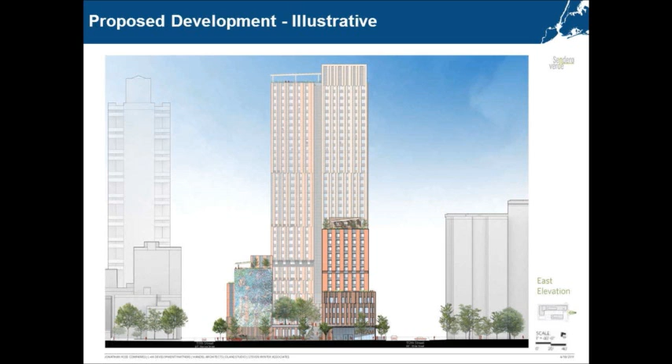Now, the actions necessary to facilitate the project. The applicant seeks a zoning map amendment to change the project area from an R7-2 zoning district with a C1-4 commercial overlay along the Park and Madison Avenue frontages to an R9 zoning district with C2-5 commercial overlays along the Park and Madison Avenue frontages. The proposed R9/C2-5 district is intended to facilitate the development of affordable housing, provide community facility space, and provide continuity on the Madison Avenue commercial corridor.

According to the applicant, the proposed R9 zoning is consistent with the context of the buildings in the surrounding area and conforms to the prevailing trend towards high-density residential development in the neighborhood. All of the blocks located immediately north of the project area contain buildings constructed in the tower-in-the-park style and rise up to 20 stories.

The project area is also 3 blocks north of a recently approved affordable housing development that also utilizes an R9 residential district. The R9 district bulk regulations proposed for the project area permit buildings up to 175 feet in height that must be located at the street line, and provide a permitted bulk envelope at the development site location, which, according to the applicant, serves to mediate the existing tower-in-the-park high-rise developments located to the north and west from the existing mid-rise buildings located to the west and south.

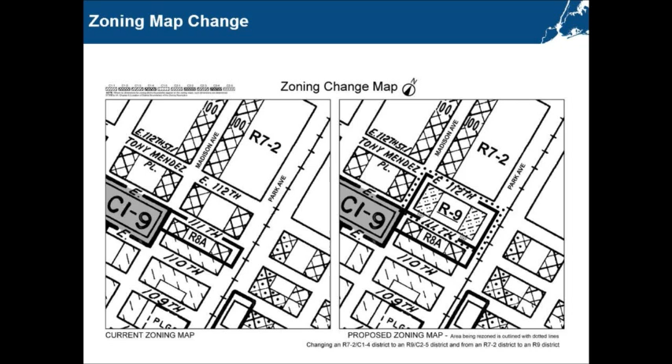The applicant also seeks to amend Appendix F of the zoning resolution to establish a mandatory inclusionary housing area over the project area. The applicant is proposing to utilize Option 2, and therefore requests the City Planning Commission and City Council to allow the MIH affordable housing requirements to be met by complying with Section 23-154(d)(3)(ii) requirements and providing no less than 30% of the residential floor area to households earning an average of 80% AMI.

The applicant is requesting approval of an urban development action area and project approval and the disposition of city-owned property. The applicant also requests to acquire a portion of the disposition area for use as community garden space and a publicly accessible path. The garden area and path portion would be acquired by the city upon or before project completion, including completion of construction of the garden area and path.

The applicant is seeking a special permit from the City Planning Commission pursuant to Section 74-743 to modify the bulk regulations within a large-scale general development, to modify height and setback restrictions and yard requirements applicable to the proposed development as follows. Pursuant to Section 23-65, the tower regulations, buildings developed with a tower shall comply with either tower and base, or standard tower regulations.

Pursuant to Section 23-65A, any building with more than 25% of its total floor area dedicated to residential use and located on a zoning lot that fronts upon a wide street, and is within 125 feet from a wide street frontage along the short dimensions of the block, or within 100 feet from a wide street frontage along the long dimensions of the block, must be developed or enlarged pursuant to the tower and base provisions.

Further, if any building is developed with a tower, then the entire zoning lot shall be subject to the tower and base provisions. Section 23-65B provides that standard tower regulations of Section 23-652 apply to any building that does not meet the location criteria of Section 23-65A.

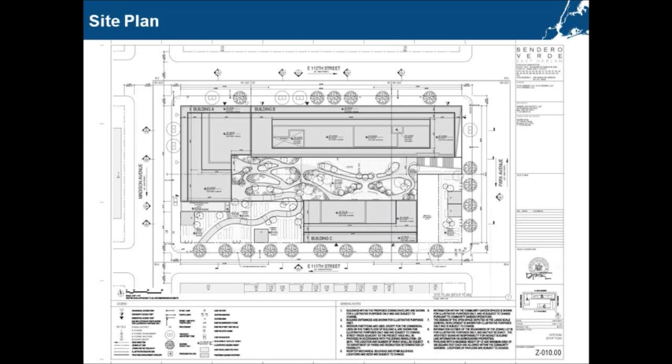Since all the buildings on the proposed development site, including those portions beyond 125 feet from the wide street frontage along the short dimensions of the block, and beyond 100 feet from the wide street frontage along the long dimensions of the block, are proposed to be subject to the tower and base provisions, the applicant is requesting that the Commission waive the location criteria of Sections 23-65A and 23-65B to apply the tower and base regulations to the entire development site.

Section 23-651A1 requires that at all levels, a tower meeting the location and floor area requirements of Section 23-65A that is developed on zoning lots of at least 20,000 square feet shall occupy between 30 and 40% of the lot area in the aggregate. As previously discussed, a portion of the proposed development will not meet the location criteria of Section 23-65A.

The applicant is requesting that the Commission permit the aggregate tower calculation to be based upon the entire area of the development site, including those areas beyond 125 feet from the wide street frontage along the short dimensions of the block. Further, tower coverage ranges from 51%, which you can see right here,

at 85 feet, to 13% above 196.5 feet, which you can see right here. The applicant is requesting the Commission to modify the tower coverage requirements to permit the towers of all buildings on the zoning lot to occupy, in the aggregate, an area comprising less than 30% of the lot area of the zoning lot at the upper levels of the tower, and more than 40% of the lot area of the zoning lot at the lower levels of the tower.

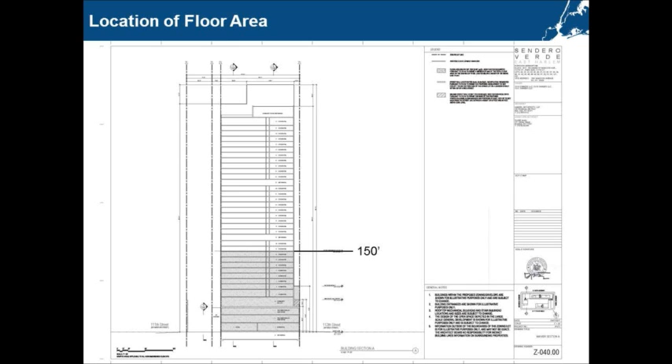Section 23-651A3 requires that a minimum of 60% of the total floor area permitted on the zoning lot be located below 150 feet. As the proposed development will contain 424,169 square feet of zoning floor area, or 55% of the total floor area, located below 150 feet, the applicant requests that the Commission modify floor area location requirements to permit 55% of the total floor area to be located below 150 feet.

Section 23-651B1 requires that a street wall be provided for the entire frontage of zoning lots fronting on wide streets and on narrow streets within 125 feet of an intersection with a wide street. Section 35-64A1 requires that mixed-use buildings developed as tower-on-base in R9 or R10 districts with a commercial overlay provide a street wall for the entire width of the base, located on the street line of zoning lots fronting on wide streets and on narrow streets within 30 feet of its intersection with a wide street.

As community gardens are proposed for much of the frontage of Park Avenue, which is a wide street, and East 111th Street, which is a narrow street within 125 feet of its intersection with Park and Madison Avenues at the southern corner of Madison Avenue, where another garden is proposed, no street wall is proposed for those areas. Additionally, no street wall will be provided at the northeast corner of the zoning lot at the intersection of Park Avenue and East 112th Street, as the proposed ground floor of Building B will be undercut at the ground floor.

The applicant requests that the Commission modify the street wall requirements pursuant to Section 23-651B1 to permit the proposed development to not occupy the entire frontage of the zoning lot along a wide street and on narrow streets within 125 feet of its intersection with a wide street, and to permit the base of the street wall of the proposed development to not be located entirely at the street line.

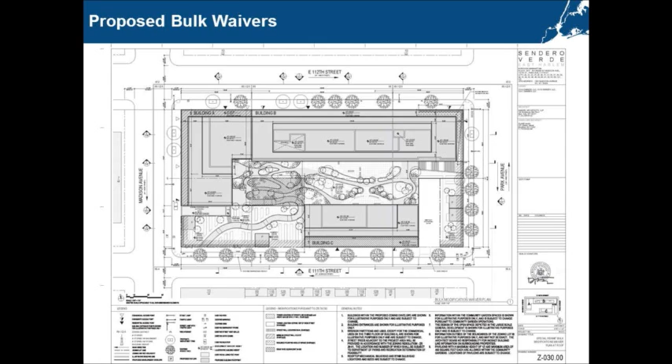Section 23-651A4 requires that towers along a narrow street set back a minimum of 15 feet from the street wall at any level, and that towers along a wide street set back a minimum of 10 feet from a street wall at any level. The maximum base height for a tower-in-base building developed within an R9 zoning district is 85 feet. Since the proposed Building C is located on a narrow street and first sets back 15 feet from the street wall at a height of 94.34 feet, a portion of the tower will be located at the street line. The applicant requests that the Commission modify the tower setback requirements to permit portions of towers in the proposed development to be located at the street line.

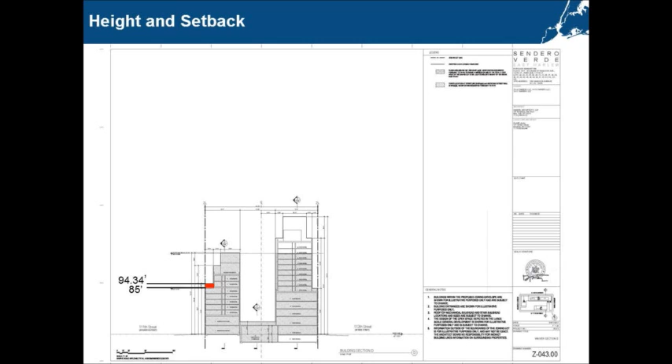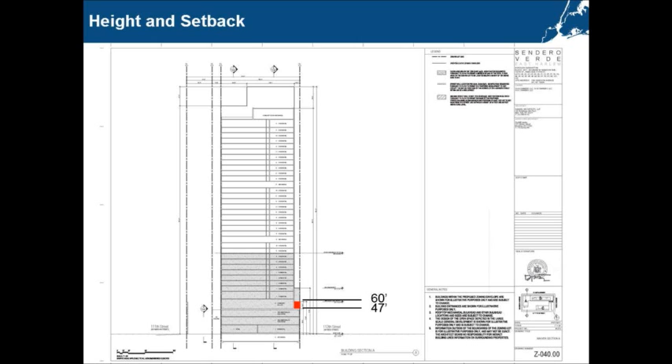Section 23-651B2 requires that the street wall of a base rise to a height between 65 and 85 feet. As the base of Building A is proposed to rise to a height between 47 and 60 feet before setback, and the base of Building C is proposed to rise to a height of approximately 94 feet before setback, the applicant is requesting the Commission modify the base height requirements of Section 23-651B2 to permit the base of the proposed tower-in-base development along Madison Avenue and portions of 112th Street to set back from the street line between a height of 47 and 60 feet above curb level, and to permit the base height along East 111th Street and East 112th Street to exceed a height of 85 feet above curb level, as depicted on the plan submitted with this application.

Section 23-382 requires that an open area with a minimum depth of 60 feet, midway or within 5 feet of being midway between two street lines.

Community facilities are permitted within rear yard equivalents within 100 feet of the street line of a wide street, provided that the community facility is used for a school, house of worship, college or university, or hospital use. These facilities may be up to a height of 1 story, but not exceeding 23 feet.

A portion of the proposed development will include a community facility that is not a permitted school, house of worship, college or university, or hospital use that will obstruct the rear yard equivalent. The applicant requests that the commission consider a community facility that does not contain a school, house of worship, college or university, or hospital use as a permitted obstruction.

The applicant requests a special permit from the City Planning Commission pursuant to Section 74-744B to allow commercial use to be located above the level of a second story in a mixed-use building, contrary to the provisions set forth in Sections 32-42 and 32-435C.

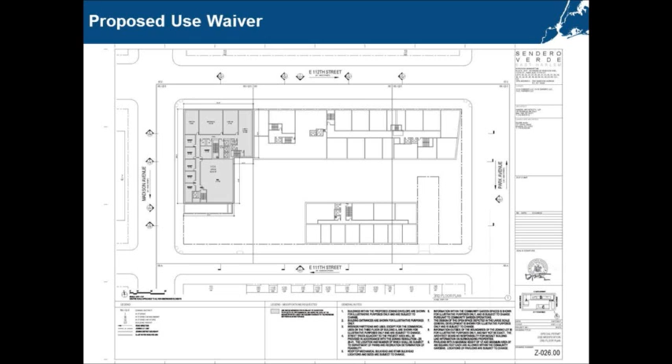Section 32-42 does not permit commercial uses within a predominantly residential building to be located above the second level. The proposed development includes space for healthcare-related offices at the second and third levels of Building A. You can see right here is the third floor where the community facility, or the commercial use, is proposed. The special permit is requested to permit commercial uses to be located above the second level of Building A.

The applicant requests a special permit from the City Planning Commission pursuant to Section 74-532 to waive up to 129 accessory off-street parking spaces required in connection with up to 322 units affordable to families earning over 80% area median income within the proposed development. Section 25-23 of the zoning resolution requires that accessory off-street parking spaces are provided for a minimum of 40% of new dwelling units in R9 zoning districts, affordable to families earning incomes of 80% AMI or higher.

The proposed development may include up to 322 units of affordable housing that will be rented to families earning incomes of 80% AMI or higher. In connection with these units, up to approximately 129 off-street accessory parking spaces may be required to be provided in the proposed development. The proposed special permit would waive the requirement to provide up to 129 accessory off-street parking spaces within the proposed development.

Finally, the applicant requests a certification from the City Planning Commission pursuant to Section 32-435 to waive the requirement that a minimum of 50% of building wall facing upon a wide street be occupied at the ground level by commercial uses. The areas that are being requested to be waived are located right here and right here. So this is where the school will be located.

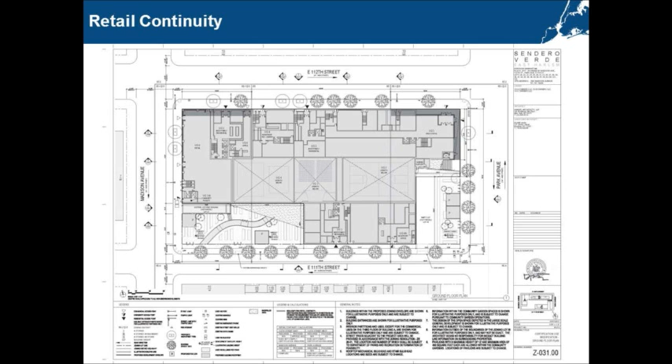The proposed Sendero Verde development is being analyzed as an alternative in the draft environmental impact statement for the proposed East Harlem rezoning. The Sendero Verde development alternative would not result in any additional significant adverse impacts as it relates to shadows or historic resources than those already identified for the East Harlem rezoning proposal.

Additionally, the Sendero Verde project would have a potential adverse open space impact, plus significant adverse transportation and construction-related noise impacts beyond those identified in the East Harlem rezoning proposal. Mitigation measures to address these impacts will be explored between the draft and final EIS. Thank you.

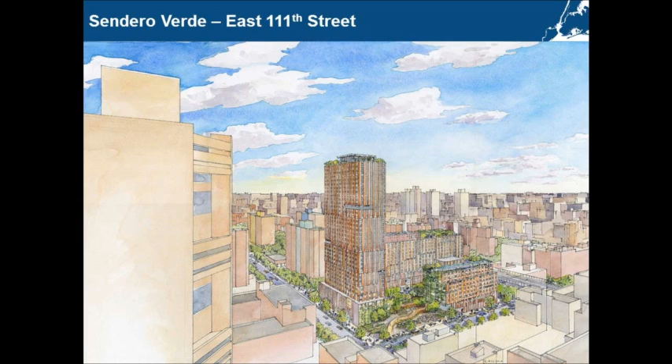Commissioner Cantor: With respect to the very last item you mentioned, it struck me as I read it—would it be putting any constraints upon the commission if we were to approve this, if we were to certify this now, rather than wait until we learn a bit more about the East Harlem redevelopment?

Well, it's traveling with the environmental impact statement for the East Harlem rezoning, so it needs to travel along with the same timeline as the East Harlem rezoning, as it's being analyzed in the DEIS for.

I guess my question is, does certification of this in any way create a potential inhibition to any of the activity—our doing any changes, or the community doing any changes? Oh, no, no, there's still definitely room, and I think we anticipate as this project moves through the public review process that changes will definitely occur, and we can address further concerns at that time.

Okay, thank you. Other questions? Vice Chair Knuckles. Thank you.

Passive house standards—is that the new nomenclature now for green, gold standards? I believe it's separate from LEED, but it's better than that, actually. I don't know the specific differences between LEED and passive house, but to my knowledge they're either comparable or passive house may be even more environmentally friendly. I don't know that answer for sure, and I can confirm that for you. Thank you.